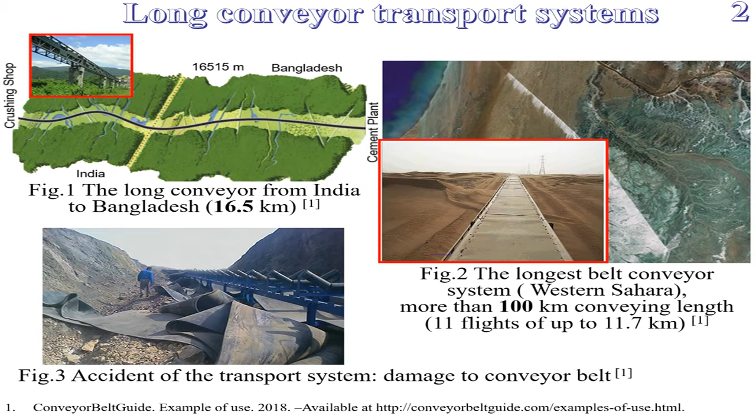Belt conveyors are one of the main types of permanent transport in the mining industry. The total length of the modern conveyor-type transport system exceeds 100 kilometers and the length of separate sections is up to 20 kilometers. Despite its apparent simplicity, a transport conveyor is a complex dynamic distributed system which implies a transport delay.

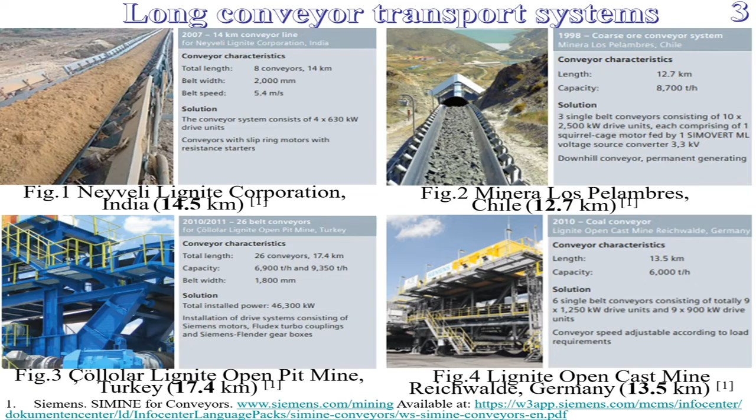The main characteristics of a long conveyor transport system are presented on this slide. The cost of energy for transportation is a significant part of the cost of the transported material and of the mining cost as a whole. Synthesis of algorithms for optimal control of the flow parameters of a conveyor-type transport system is a way to reduce the specific energy consumption for material transportation.

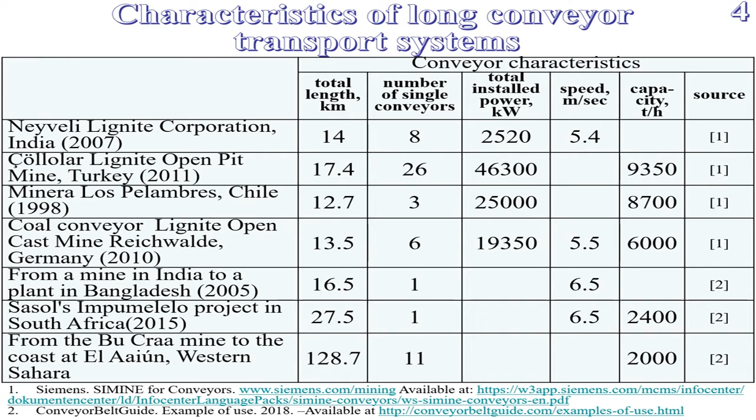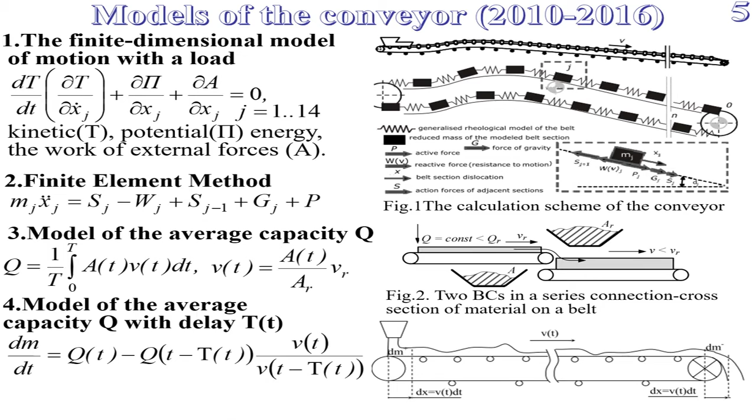With a material load factor of 70%, the transport cost is, in the general case, 20% of material cost. To increase the material load factor, the transport system is divided into sections. When designing a control system of the conveyor-type transport system, the analytical model was proposed as a model of a conveyor section. Two main types of these models are usually used. The first type is distributed numerical models. And the second type is aggregated models.

In previous papers, it was shown that the analytical PDE model is the most effective tool for describing the transport conveyor. However, the efficiency of this model decreases with an increase in the number of sections in the transport system. At the same time, the tendency to increase the extraction of material in the mining industry requires a significant increase in the number of sections in the transport system. In this regard, the problem of building models of the transport system containing a large number of sections becomes an urgent problem.

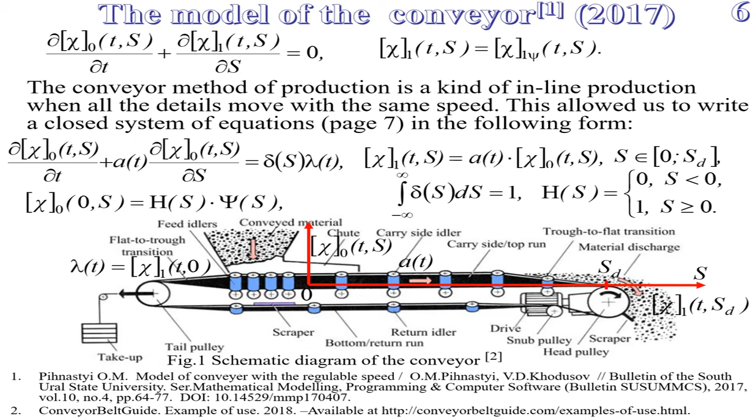This circumstance explains the recent appearance of a sufficient number of works devoted to the use of a neural network for modeling a transport conveyor. The main problem that hinders the widespread use of neural networks for building these models is the lack of appropriate data sets for training a neural network. Why is that? In many cases, collecting data for training is not possible.

This is because in order to collect the data, it is necessary to operate the transport system in economically unfavorable conditions that require significant expenditures of material resources, or in conditions that can lead to destruction of transport equipment and the system as a whole. One of the ways to solve this problem is to build input flow generators, provided that their model is based on production data. In this paper, a method for generating those data sets for training a neural network was considered.

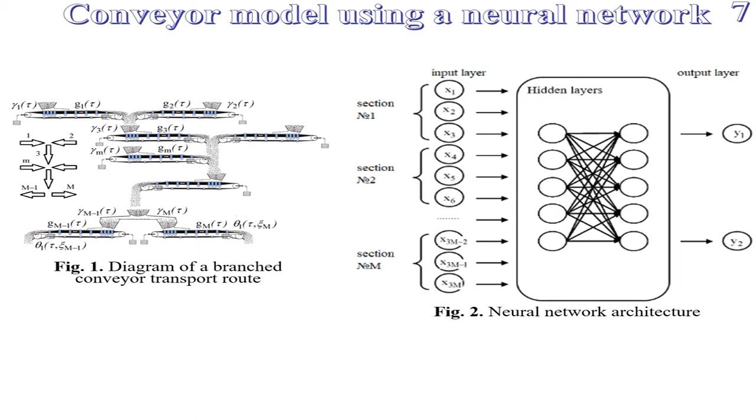The main goal was to form a countable number of data sets, characterized by a certain correlation function and a distribution law, that can be used to train a neural network. For that, it was necessary to support or decline some assumptions made in publications, in particular assumptions about the correlation function and the distribution law of the input material flow of the transport conveyor. We assume that theoretical assumptions must be substantiated by experimental results. Our analysis was made based on the assessment of functioning system experimental data.

The statistical data of input material flow was taken for the bucket wheel excavator SR2000. As a result, it was demonstrated that the hypotheses put forward about the normal law of distribution of the material input flow value don't correspond to the experimental data. On the other hand, the existing recommendations that the correlation functions can be approximately represented in exponential form are confirmed. This is an important result of the present study. Although additional studies of works that present experimental data of the magnitude of the input material flow for modern transport conveyors are required.